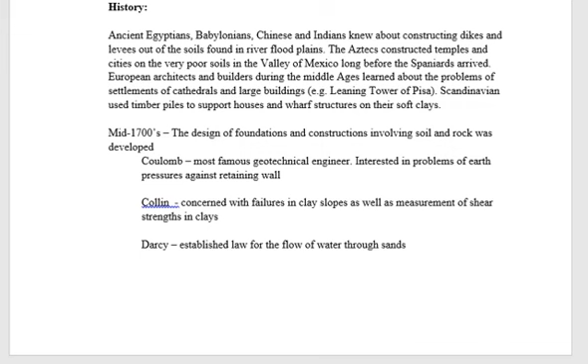Then here comes Mr. Collin, whose study is concerned with failure in clay slopes, as well as measurement of shear strengths in clays. Then we have Mr. Darcy, established law for the flow of water through sands. So usually sila, ma-encounter nyo sila sa inyong soil mechanics na mga subjects. Okay. Then we have Rankine. He developed the method for estimating the earth pressure against retaining walls.

Okay. And then we have Mr. Gregory. He utilized horizontal subdrains and compacted earth fill buttresses to stabilize railroad cut slopes. Okay. And during 1914 and 1922, Mr. Atterberg defined the consistency limits for clays. Then the Geotechnical Commission of the Swedish State Railway, the first to use the word geotechnical.

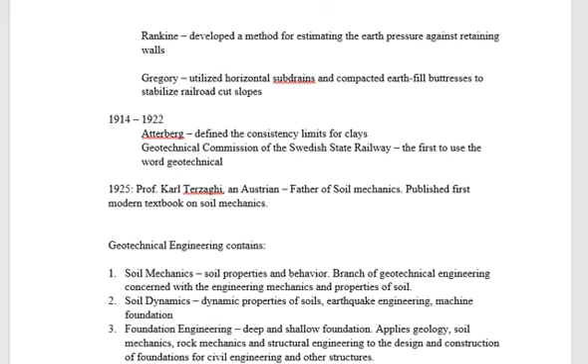And year 1925, Professor Karl Terzaghi, an Austrian known as father of soil mechanics, published the first modern textbook on soil mechanics. So yun siya yung pinakaunang nakapag-publish ng libro about soil mechanics.

So geotechnical engineering contains soil mechanics, which is about soil properties and behavior. This is the branch of geotechnical engineering concerned with the engineering mechanics and properties of soil. Okay, may subject na soil mechanics sa higher years ninyo. And then soil dynamics, dynamic properties of soils, earthquake engineering, machine foundation. Usually yung dynamics of movement. So galaw ng lupa. Okay, paggalaw.

Then we have the foundation engineering. There are two types, the deep and the shallow foundation. So it applies geology, soil mechanics, rock mechanics, and structural engineering to the design and construction of foundations for civil engineering and other structures. So, mayroon din kayong subject na foundation engineering in your higher years. So, this topic will be discussed to you in detail.

Okay, we have the pavement engineering, flexible and rigid pavement. I think kasama rin siya sa transportation engineering siguro na subject. And then we have the rock mechanics, rock stability and tunneling. So it's concerned with engineering mechanics and properties of rocks. And the geosynthetics is about soil improvement, on how you will improve the soil condition na hindi siya basta-basta mag-fail or wash out.

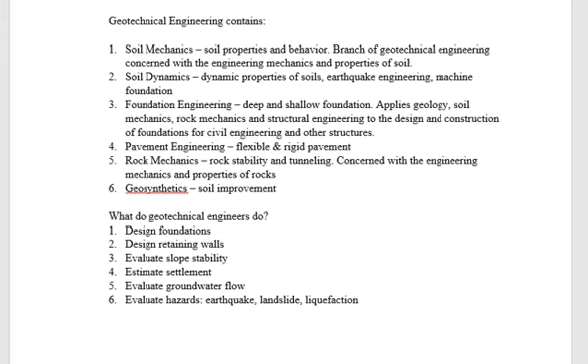Okay, so let's discuss soil relationships and classification. When we say soil, it is the relatively loose agglomerate of mineral and organic materials and sediments found above the bedrock. So soil is the product of rock. Nanggaling siya sa bato na nadurog, kaya siya naging soil. Tama ba? Yes. So rocks have very strong internal cohesive and molecular forces which hold the constituent mineral grains together. Kapag nag-break yung mga mineral na yun, nagiging soil. Lahat naman siguro kayo familiar na sa soil and rocks.

Then weathering is the geological process that produces soil, either chemical or physical. In order to classify soil, we use two standard systems. One, the Unified Soil Classification System or ASTM D2487-93. It's used for virtually all geotechnical engineering work except highway and road construction. Kung highway and road construction, ang ginagamit na classification is AASHTO M145-87. We'll not discuss that in detail now.

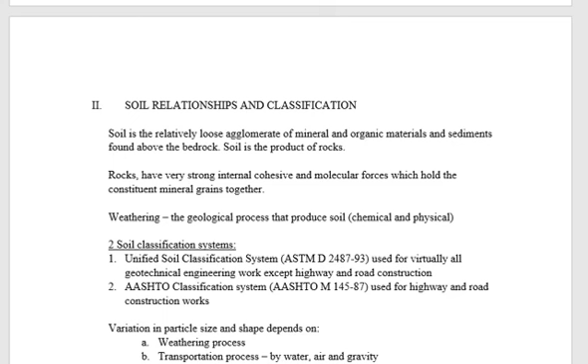Then we have some variation in particle size and shape, which depends on the weathering process. Nag-form yung soil by means of weathering: sobrang ulan, init, snow, o masyadong wet. Then by transportation process, either by water, air, or gravity. Kung by water, dinala siya ng agos ng river. Air naman, pag may ashfall, buga ng bulkan, may mga lupa or soil na kasama. Then by gravity, yung nag-landslide or nahulog from the mountains.

Types of soil produced by weathering and transportation: we have boulders, yan yung mga malalaking bato, massive. Then we have gravel, sand or buhangin, silt, and clay. Clay, yung lagi nang nilalaro.

We have Table 3-1, USCS definition of particle size ranges and symbols. Ito yung soil fraction or component, symbol, then size range. Pag boulders or cobbles, greater than 300 mm. Coarse-grained, 75 mm. Ito yung percent passing niya. Coarse sand, fine sand, coarse gravel, fine gravel. Ito yung mga ginagamit sa construction materials.

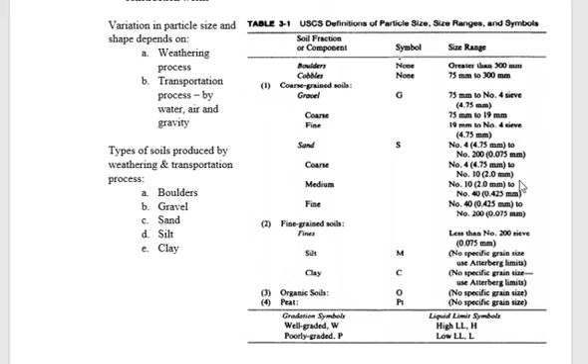Then we have the fine-grained soils, silt and clay. During your soil mechanics, merong mga laboratory na ginagawa to identify each classification of soils. Next, all soils consist of a collection of grains with varying spaces between them, usually filled with water. Soils are usually cohesionless, cohesive, or organic. Cohesionless soils have particles that do not tend to stick together, mostly sand, maybe some silt. Buhangin is an example; hindi nagdidikit kasi hindi malagkit.

Then cohesive soils are characterized by very small particle sizes where surface chemical effects predominate. They are both sticky and plastic, mostly composed of clays. Then organic soils are typically spongy, crumbly, and compressible, undesirable for supporting structures. They're distinguished by a dark brown to black color, siguro yung black earth, pang gardening or pang agriculture na type of soil.

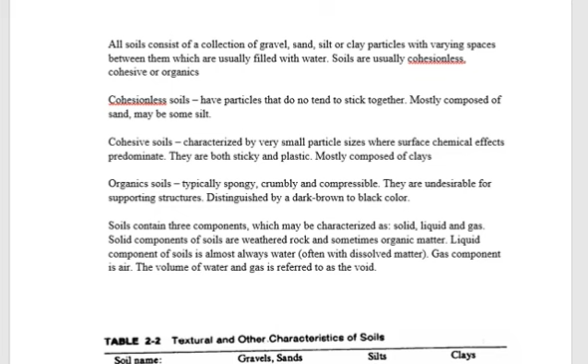Soils contain three components: solid, liquid, and gas. Solid components are weathered rocks and sometimes organic matter. The liquid component is almost always water, often with dissolved matter. The gas component is air. The volume of water and gas in soil is referred to as the void, so lagi siyang may void. We have Table 2-2, textural and other characteristics of soils: soil name, grain size, characteristics, the effect of water on engineering behavior, and the effect of grain size distribution on engineering behavior.

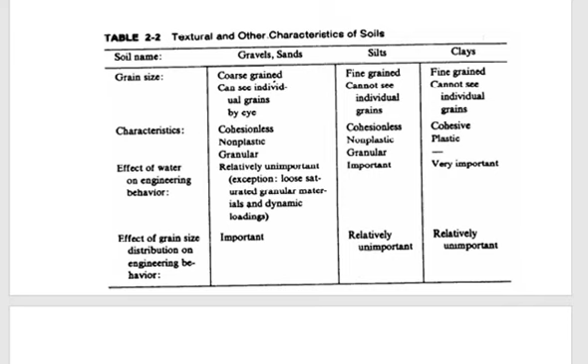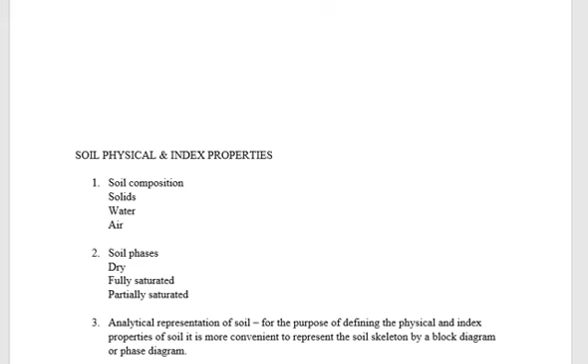Okay, let's go next. Soil physical and index properties. We have number 1, soil composition. We have the solids, water, and air. Then soil phases: dry, fully saturated, and partially saturated. Then we have the analytical representation of soil. For the purpose of defining the physical and index properties of soil, it is more convenient to represent the soil skeleton by a block diagram or phase diagram.

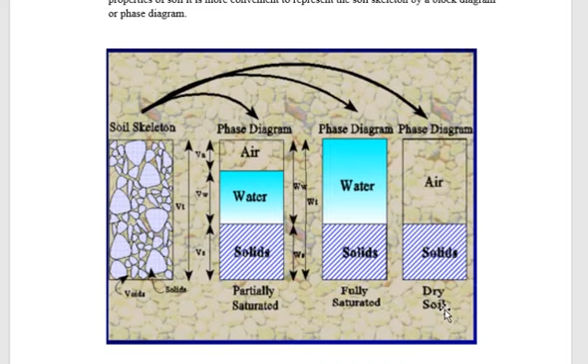And let's go to weight volume relationships. So the total volume of soil, so we have its height, width, and the length. So to get the total volume of soil, we have volume of voids plus volume of solids, equals to volume of air plus volume of water plus volume of solids. So this is the volume of voids, this is the volume of air, and the volume of water.

Okay, usually this graphical representation of soil properties you may encounter in your higher years. So it will be discussed in detail. So when we say Va, volume of air, Vw, volume of water, Vs, volume of solids, Vv, volume of voids. So same with their weight and their mass. So kung ilan yung proportion ng volume, meron siyang naka-indicate na corresponding weight and mass. Okay.

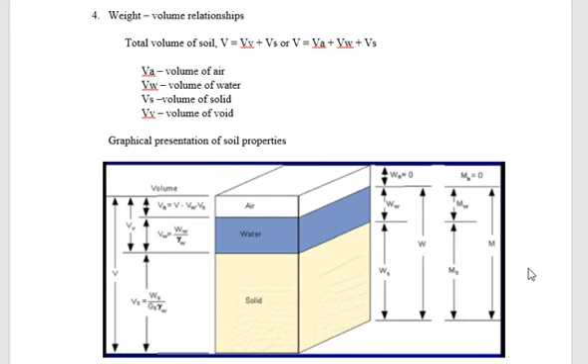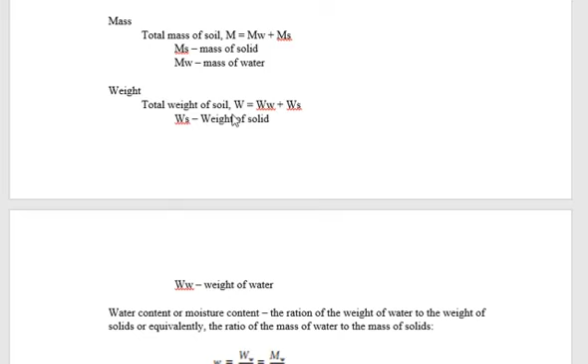And so this is the total weight ng soil sample. So neglect na yung weight ng air and mass ng air. So usually pag sinabing total weight, weight lang ng water and weight ng solids na nandun sa soil sample. So ganun din sa mass. Okay. So we have the total mass of soil, mass of water plus mass of solids. And weight, ganun din. Ba't hindi siya sumama dito? Okay.

Okay, next, water content or moisture content. It's the ratio of the weight of water to the weight of solids, or equivalently, the ratio of the mass of water to the mass of solids. So the water content is equal to weight of water divided by weight of solids, or mass of water divided by mass of solids. Unit weight is the specific weight or weight density, the ratio of the weight of material to its volume. The unit weight of water is usually 9.81 kN per cubic meter.

So for the total unit weight of soil, gamma, is equal to total weight divided by the total volume, or equals weight ng solids plus weight ng water divided by volume of solids plus volume of water plus volume of air. Sa volume, kasama na yung volume ng air. Okay, then the dry unit weight is the ratio of the weight of solids to the total volume. So gamma d is equal to dry weight, or Ws, divided by volume.

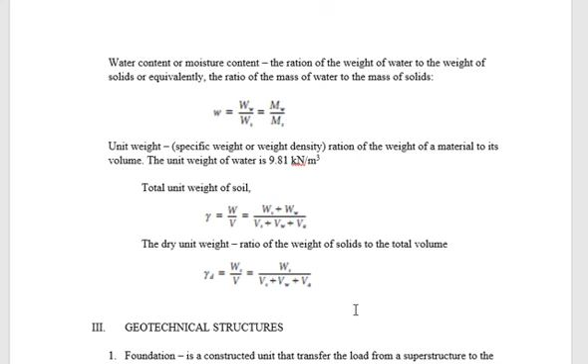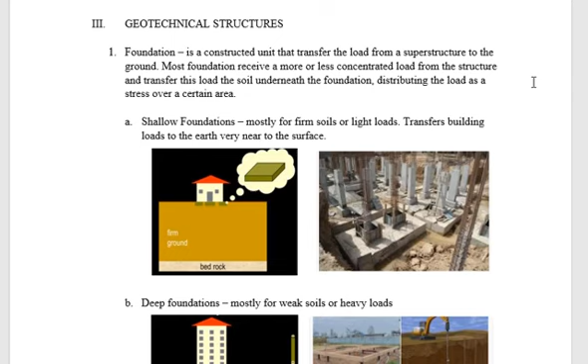Okay, then we have some geotechnical structures na considered as part of civil engineering. Number one, foundation is a constructed unit that transfers the load from a superstructure to the ground. Most foundations receive a more or less concentrated load from the structure and transfer this load to the soil underneath the foundation, distributing the load as a stress over a certain area. So we have two types of foundations, shallow foundations and deep foundations.

Okay, saan ba ginagamit yung shallow foundation? It's mostly for firm soils or light loads. It transfers building loads to the earth very near to the surface. So usually sa maliit na structure or maliit na mga building. Ito kunyari yung bahay. We have the shallow foundation, either square footing. This is combined footing. We also have rectangular footing, trapezoidal footing, circular footing. So marami tayong types of shallow foundations that you will learn how to design under your foundation design subject.

Then we have deep foundations, mostly for weak soils or heavy loads. So ito na yung mga malalalim na pundasyon, usually mga piles, sheet piles. Usually ginagamitan na siya ng mga heavy equipment. It's either binabarena or dinidrill, or pwede rin yung mga hammer. Parang pinupukpok lang.

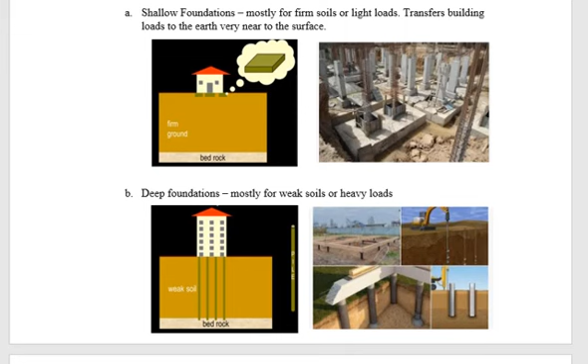Then we have slope protection. So we have the retaining walls. It is used to retain soils from spreading laterally. So ito yung mga examples ng retaining walls.

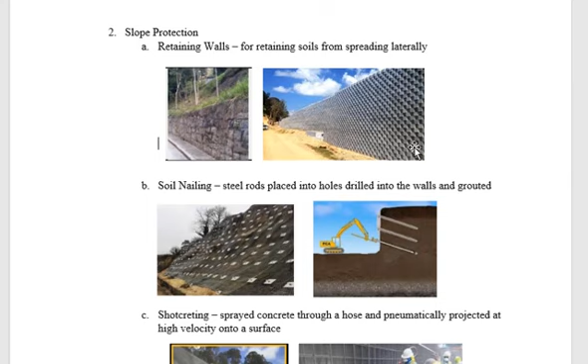Then we have some example of slope protection. We have the soil nailing, steel rods placed into holes drilled into walls and grouted. So ito yun. So may mga steel rods dyan, babaon gamit ng heavy equipment or drilling machines.

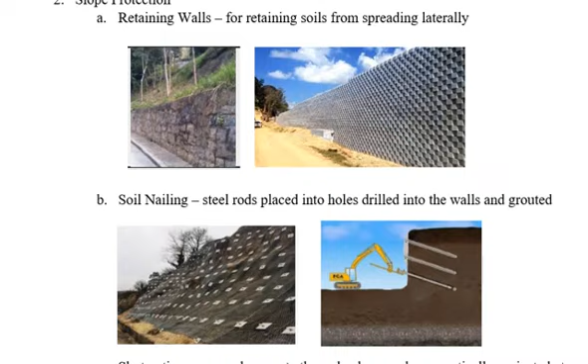Expensive. Okay, we have the shotcreting. So it's sprayed concrete through a hose and pneumatically projected at high velocity onto a surface.

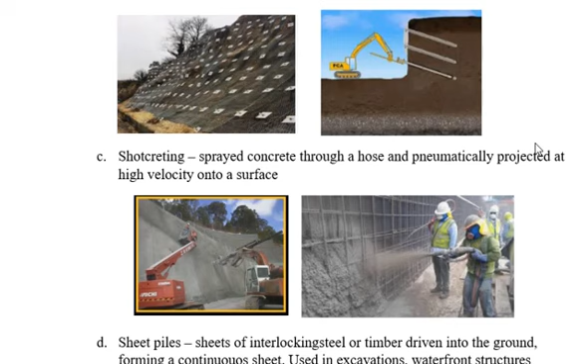Then we have the sheet piles. So sheet piles naman is sheets of interlocking steel or timber driven into the ground, forming a continuous sheet. So it's used in excavations, waterfront structures.

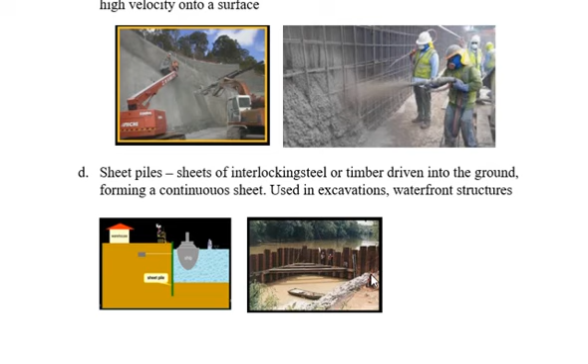We have the dams. It is used for impounding water. So we have earth dams. There are many types of dams actually. So ito lang muna ng dalawa ang discuss ko. We have the earth dams. It's embankment dam built by compacting successive layers of earth.

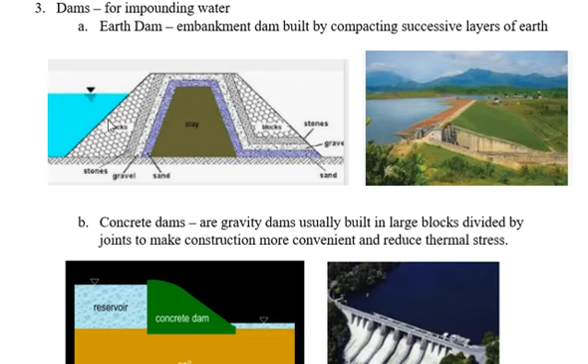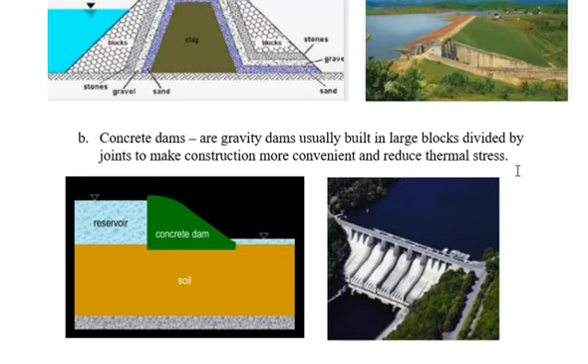Then we have concrete dams. Gravity dams are usually built in large blocks divided by joints to make construction more convenient and reduce thermal stress. This is an example of concrete dams used for hydraulic structures, for hydraulic energy or energy purposes.

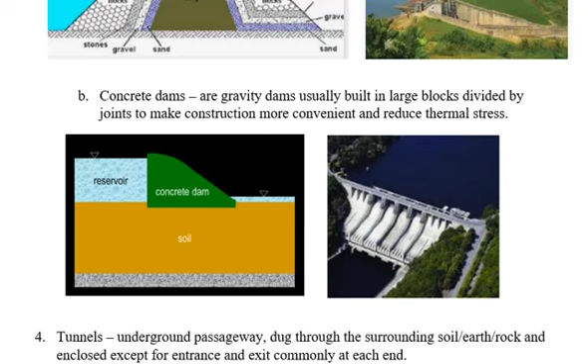Then we have tunnels. It's an underground passageway dug through the surrounding soil or earth rock, enclosed except for entrance and exit commonly at each end. These are used for subways or where trains pass underground, like the subway project being built now in Metro Manila. For the first time in history, we will have a subway, because traffic in Manila is so congested. I'm sure it will be sturdy since the contractor is Japanese.

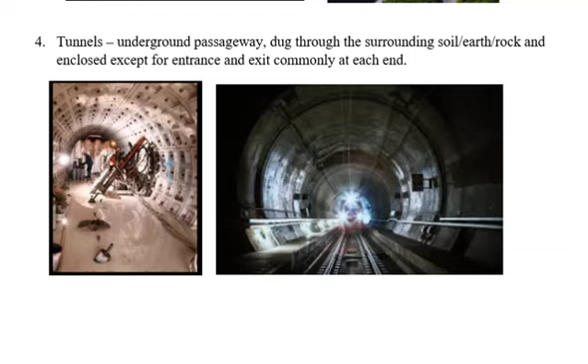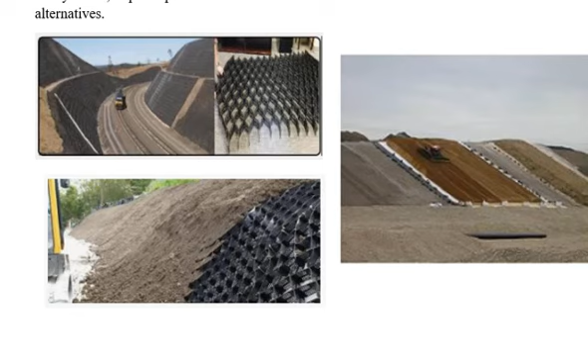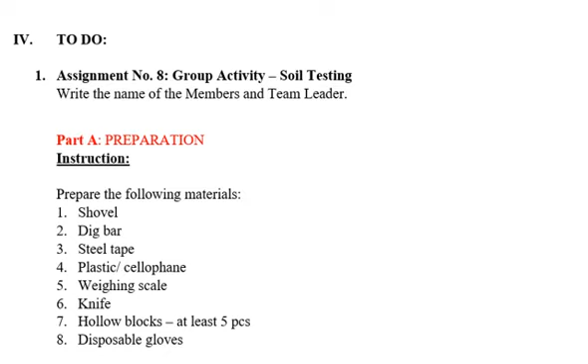For your next activity, a group activity again, you will conduct soil testing. You need to prepare the following materials. What you need to do: go to the back of your house and measure a 1.5 by 1.5 square. So you'll make a square like this, with dimensions 1.5 by 1.5, at the back of your house, and make sure it's safe.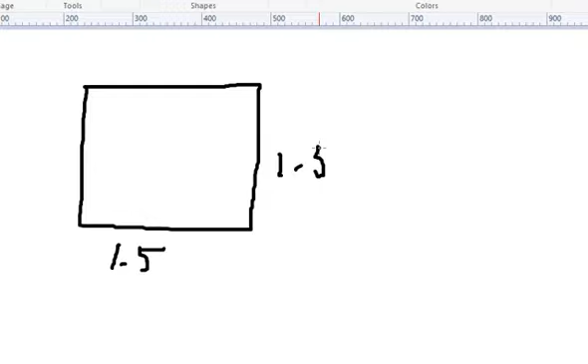After which, dig a hole at a depth of at least 1 meter. This is the plan view, 1.5 by 1.5 meters. Then dig a hole, this is the section view.

So this is the 1.5 by 1.5 meter hole you measured. Dig it to a depth of at least 1 meter. This is the ground. So it should look like this, a depth of 1 meter, at least 1 meter.

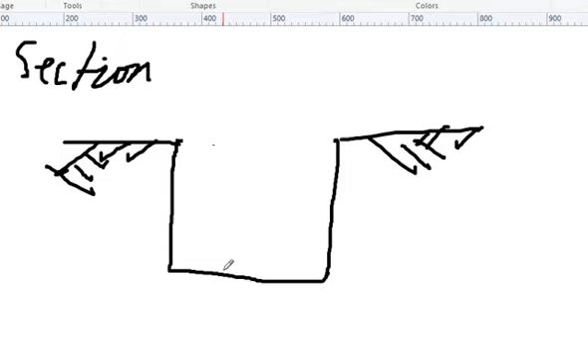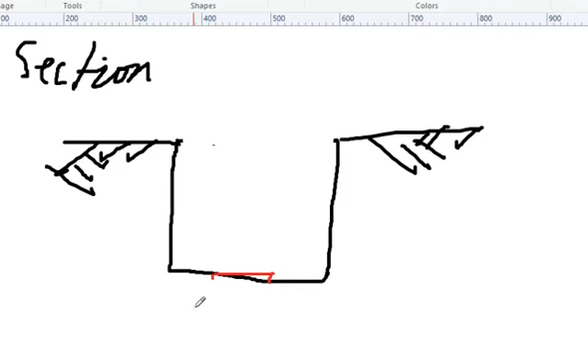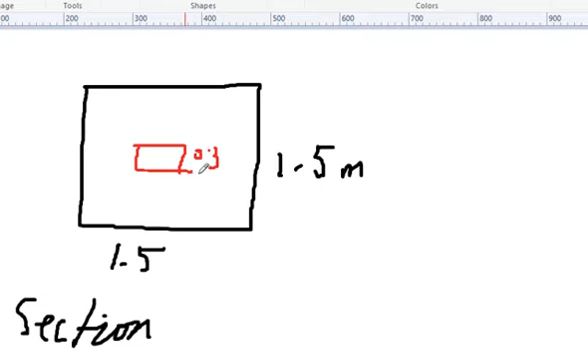Then trim the outer part, going around it. So in top view, this is the 0.3, this is now the bottom, so it's still a square, 0.3 by 0.3, in the top view or plan.

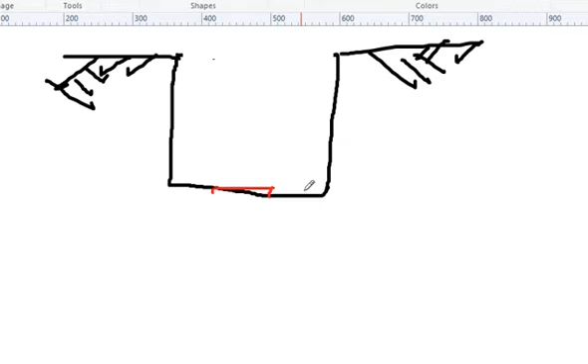Then trim the edges around it, to at least 0.2 meters deep. So dig down 0.2 meters.

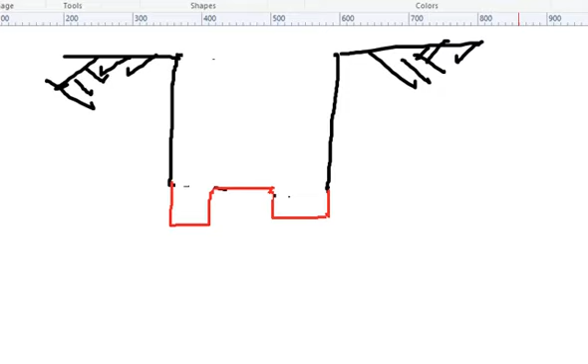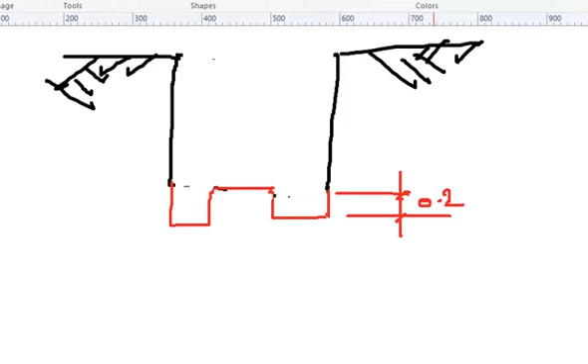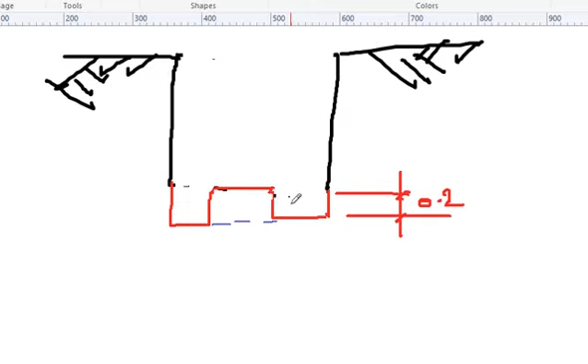Then using a knife or bolo, cut the bottom square, cut it with the bolo. Then get the soil sample, do not touch this sample with your hands. Wear disposable gloves, and after cutting, immediately get a plastic cover for it, covering it with plastic for extracting the sample, not the ground.

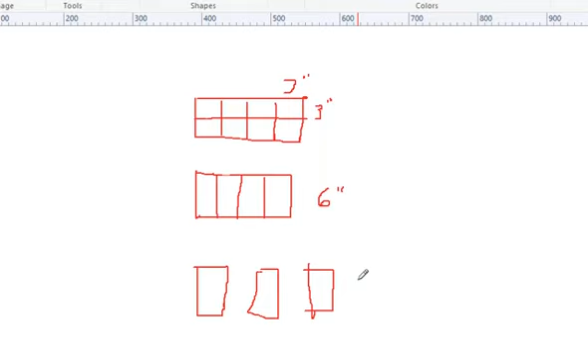Weigh each sample using the weighing scale and record its weight. Prepare at least 6 samples, labeled sample 1 to 6, then divide into phase 1, samples 1, 2, and 3.

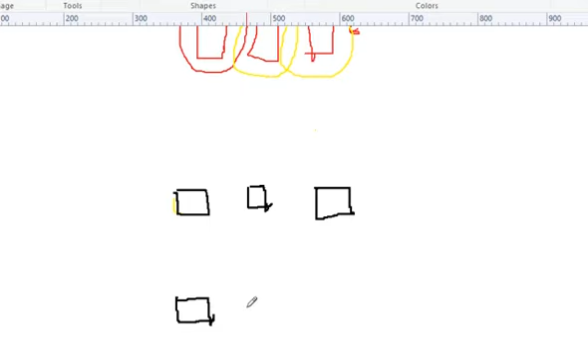Weigh each hollow block and record its weight, then put the hollow blocks above its soil sample.

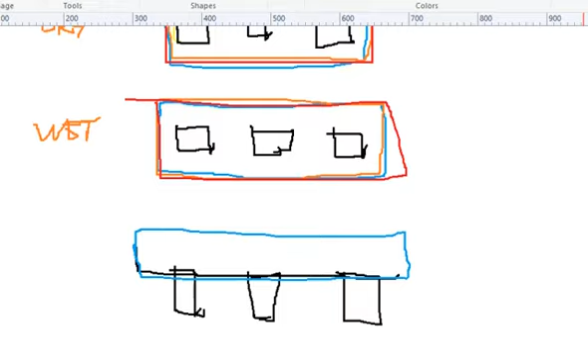Once it collapses, use the format to record your data.

We have samples 1 to 6, their weight, and the volume: 3 by 3 inches, or 0.075 by 0.075 by 0.15 meters.

Then record the dry weight by weighing after 2 days, then the weight of the solid, and compute the moisture content.

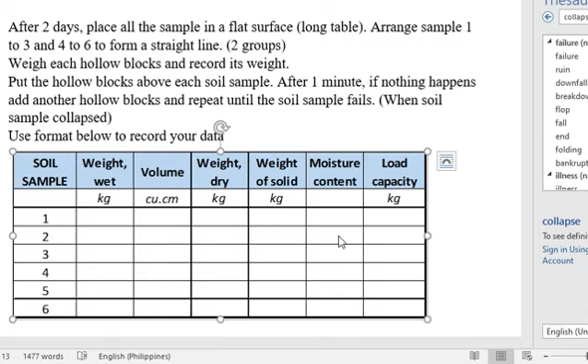Submit to me the data in Word format, including part C and part D, your learning and problem-solving activities, and attach some photos during the activities.